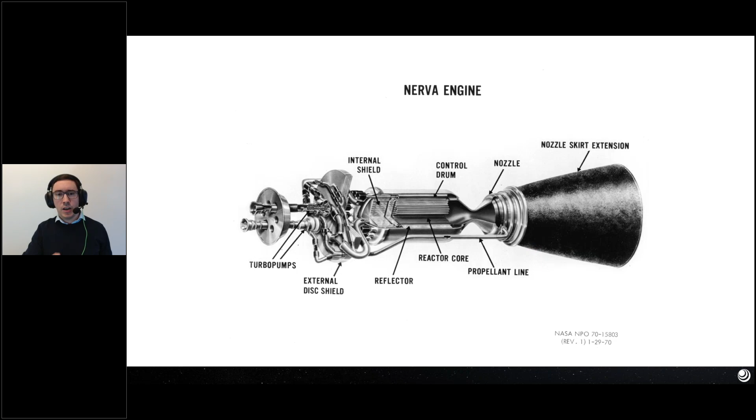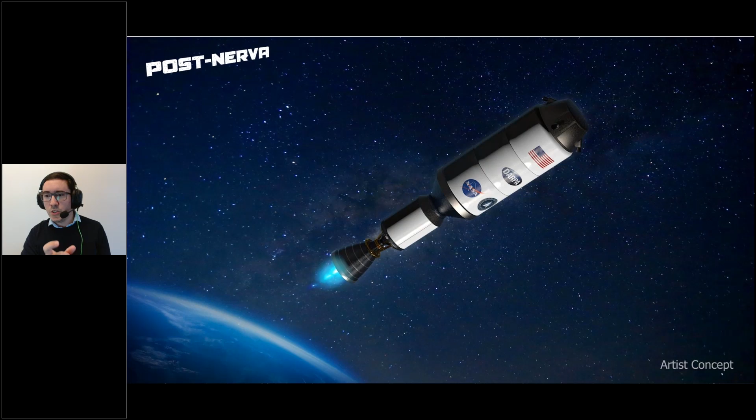Now, as I said, this is an old program from the 1960s and 1970s. And today, in the post-NERVA era, there is still research. In January 2023, NASA and the Defense Advanced Research Projects Agency announced that they would collaborate on the development of a nuclear thermal rocket engine that would be tested in space to develop nuclear propulsion capability for use in crewed NASA missions to Mars.

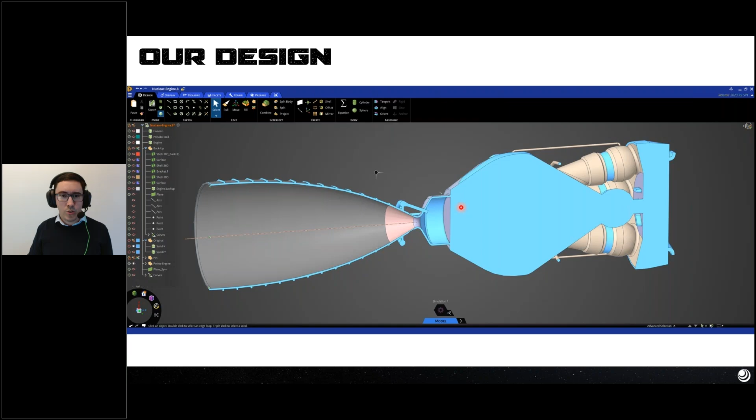Now, going into our design more in detail, we see the whole engine here that is attached to the Hermes spacecraft, and we are interested in the nozzle skirt extension in this area here. Here I could draw the geometry for easier understanding, and this is how we have tackled the model, and we have taken it into OptiSLang.

And particularly the problem, we have the skirt extension, then we have a load that is acting, connecting to this edge, and then we have a moment that is attached to the pin between the nozzle base and this column. And this is how the deflection for this column should be. So it is a mechanical problem application, and what we are trying to model here is a condition that exists during high accelerations for this spacecraft, particularly at the beginning when we move this mass in space. The way it behaves in this particular mode is depicted here in this animation.

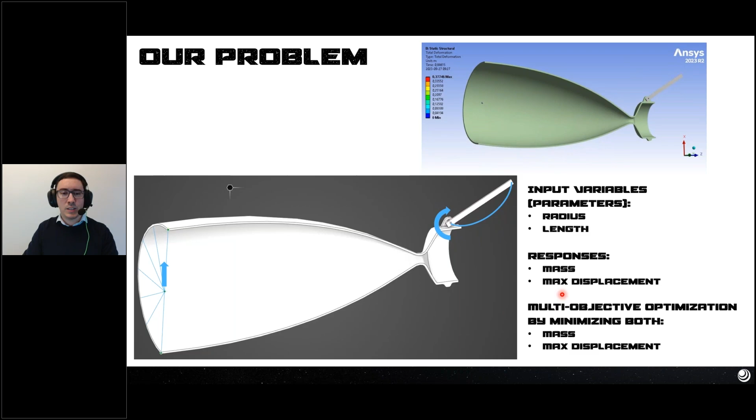We have two input variables or parameters, and those are the radius of this column and the length of it. And the responses that we are interested in are the mass of the column and the maximum displacement of it. And our objective in this project is to optimize two responses, namely the mass and the maximum displacement at the same time.

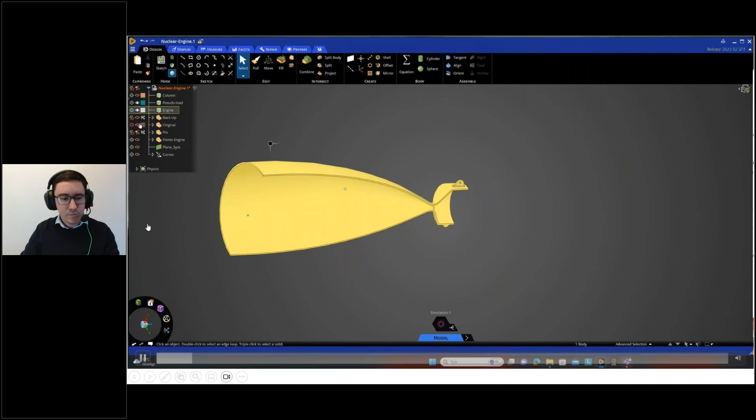Now I will go more deeply into the details on the Discovery side. And for that, I'm going to go through this video, trying to show what the tool looks like. So here on this panel, we can choose, for example, to visualize the components that we want to. We can change the color of them. We can then visualize them with different colors. We see here the full engine with all the different details and the colors.

Then at the top, we have different tabs where we can repair the geometry, we can remove areas of low quality, and then we have this simulation tab on top, and we have different options in there, and we have the possibility to move this project into a traditional tool like Mechanical or Fluent or Workbench. And here we see the materials. This material set is coming from Granta. We have more than 4,000 different materials, and we are on the model mode.

We can go into the explore mode, and then we can run the results. We see in the panel the different boundary conditions for this mechanical problem. We see gravity, for instance. We see the supports, the kinematic boundary conditions, dynamic boundary conditions, the loads. And we can define all these inside this tool. Then we have here at the top the fidelity area, and that is an important one, right? It's about the accuracy of the model. We can set up the fidelity approach.

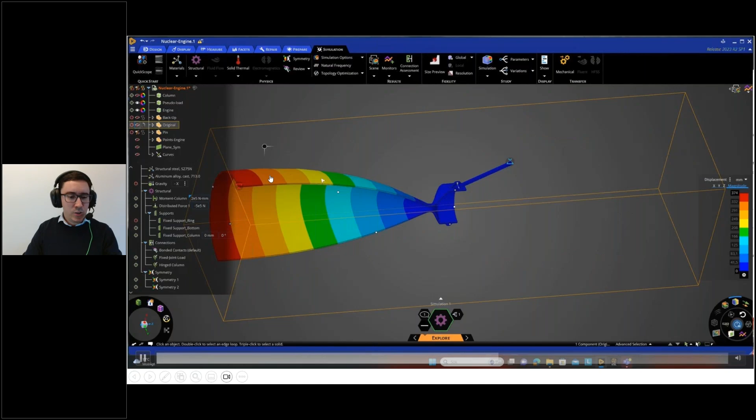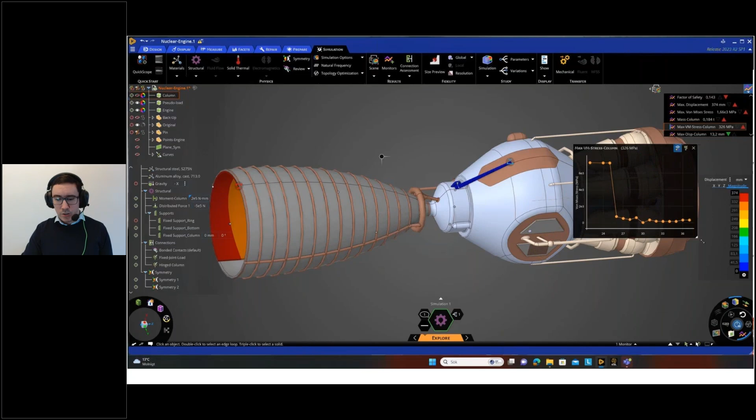We change here the mesh size for this tool, and then we can decide how accurate we want it to be. This is a tool that is using your GPU to solve it and to give results really fast. I click here to solve this model, and then it's already giving you some results. Okay, it's doing some iterations, and meanwhile you can select which part you want to see. You also select which parts or components you want to include in the simulation. Different options in there, visualization stages. I can pause the simulation, and we can also monitor different variables or results or plots and different types of results. We see how these result variables are converging to the final value with different iterations.

We pause the simulation again, and then we can see here a parameter manager, and here we can see what the values are for those parameters. And this is an important part because, as I showed before, this is the stepping stone of our next tool, that is OptiSLang. We need a parameterized model.

Then at the end, we can even move to the refine mode, where we can click again to run the simulation, and it's actually going to use the traditional solver. So in this case, it is going to run a mechanical simulation. It will create the same mesh as it would in Mechanical, and you will then be able to get that result without moving to that high fidelity tool.

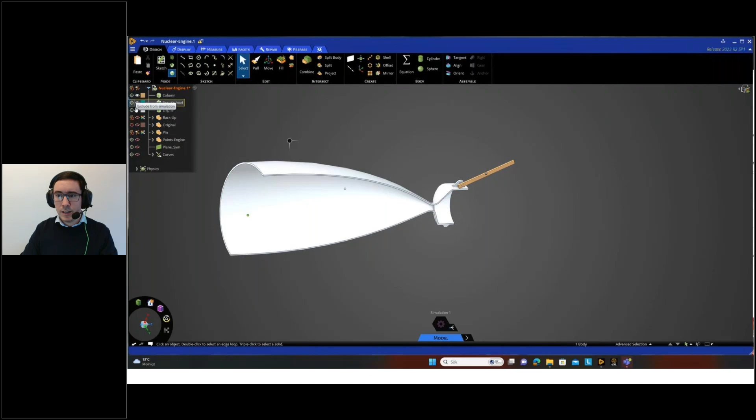So if we go to our next tool, that is OptiSLang. Well, first we use Discovery because we can achieve results very quickly, still in a low fidelity mode. And what we are going to do here is to connect that tool into OptiSLang. So I open the project, I can drag a wizard into it. Here I can drag that Discovery model to make the connection. We see here the parameters that we saw inside Discovery.

We select the responses that we want to use, also the input variables, and we can define here the range that we want to use for them. We can save those parameters in a file, and we can reload them. I can save this template for later on. And here, what I have created is the connection, right? I'm doing a check that everything is well connected.

And after that connection is done, I create a so-called sensitivity system, dragging that into our model. And here I can copy paste the same parameter set. In this step, if I let it go a little bit forward, I have selected the constraints before and the conditions, the responses in here. Then we continue.

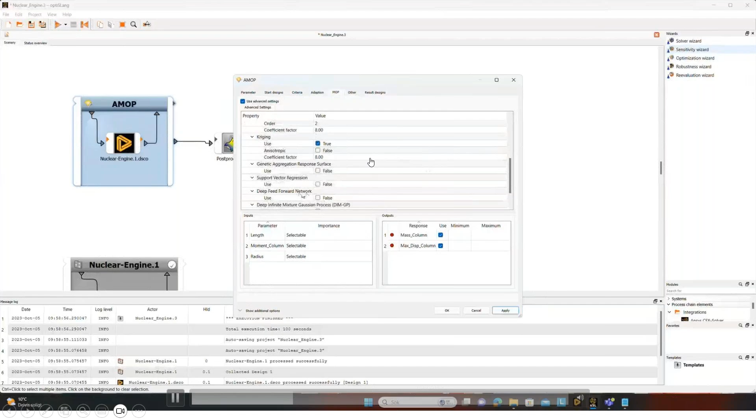We have here different algorithms for the sampling set, different steps. And then here, pay attention to this part. If you have a large amount of data, you can come to this window and this tab, and you can select to use a deep feed forward network algorithm that is integrated into this tool, again, when you have a large amount of data.

So we continue here after this setup, and I give some naming to it, and then when I click play, we'll see that OptiSLang is automatically running all those parameters and doing all those iterations, with many different variations done automatically, so you don't have to decide which points to select. And this is the part that takes most of the time, for the very localized small pool of data that is going to represent your particular problem.

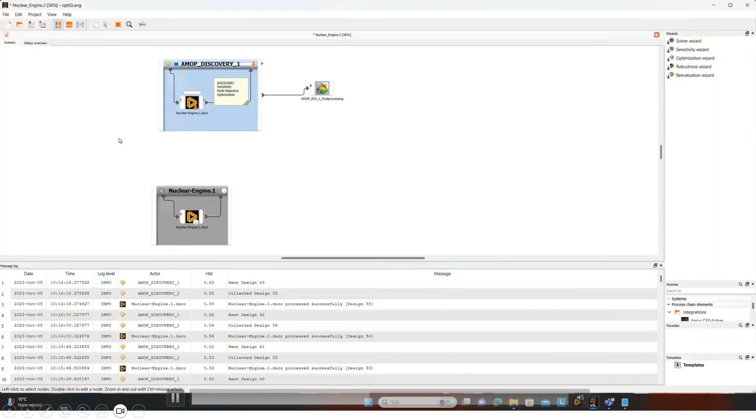And we can monitor the progress as it runs, what's happening with each design. I go a bit faster, and we see the progress, how it is going on, okay? It is running, we monitor, and then we get some results. For this particular case, we run around 100 design points in about 30 minutes.

This tool has a post-processing module, and we see here the response. We see all the data that was generated in the space we have selected, for the ranges we have chosen to explore. And we see the response surface coming from the model trained on this data. And we can visualize which parameter is more important than which. For instance, this is the radius, and we see interaction effects between them.

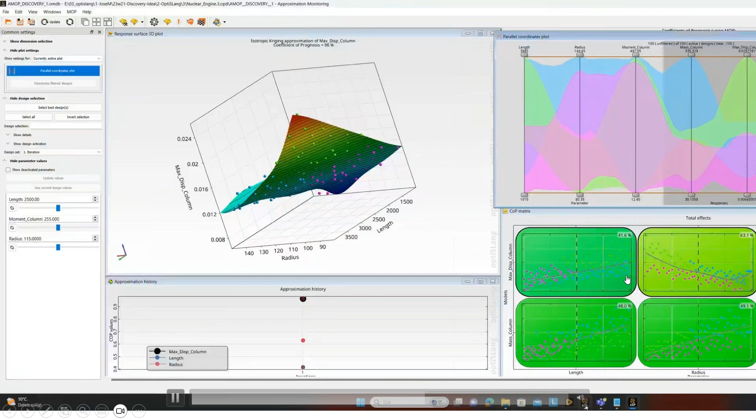We can use different tools for post-processing this data. For example, in this case I have used a cluster analysis to find trends through colors. And we see that those cluster colors are transferred to all the windows in this post-processing tool. And then coming back to the model, we go into the second sector, that is optimizing on top of the sensitivity analysis.

We do that through the wizard. So all these workflows that we are creating here are done automatically by OptiSLang. So we can say that this is a low code, or in this case, no code machine learning tool. We copy paste the same parameters from before, we keep the same responses. And I want to go back a bit. This part is important because, again, the responses, and then the next window.

Here we decide which model we want to use: our real project, or the MOP model, that is to say the trained model based on the data sets we have used for training. We have different options, and the software will recommend the algorithm that is better suited for this purpose, for optimization. So we can define with how many designs we want to validate, since we're using the trained model.

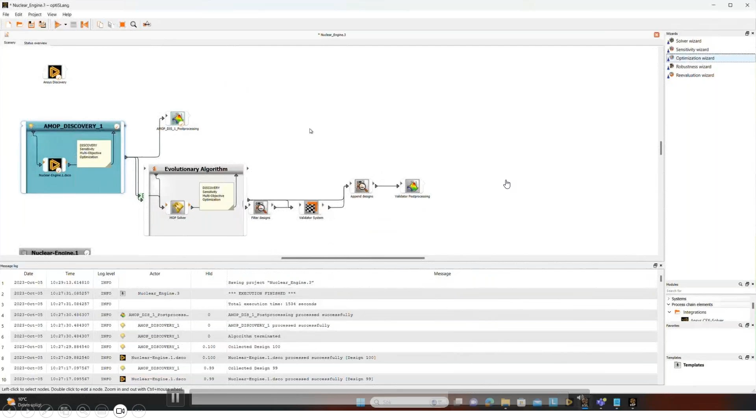The workflow is, again, automatically created by OptiSLang. This tool offers a lot of flexibility, meaning that you can tweak these workflows if you want to add extra steps or connect different tools, for instance, Excel or MATLAB. We continue forward. And after the naming, I can start the optimization journey. Now you see in real time how fast it is when we select the MOP as the base for the optimization task.

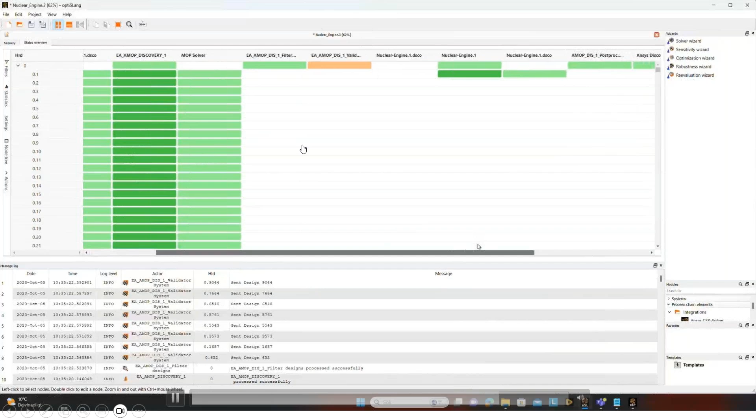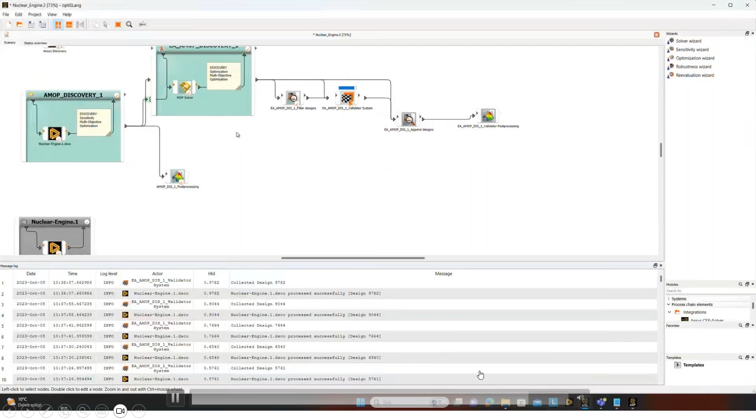So it has run already 10,000 points on the optimization part using the model that has been trained on the data set we created before. Again, we can see the progress for all the systems inside the scenery. And I go a bit back. Then it goes into the next stage in this workflow, the validation of those designs. For that, it takes the same discovery model we created before and does the validation stage. So we see that it is amazingly fast.

Then it gives us, in this post-processing window for optimization, the so-called Pareto plot. We have the two functions we want to optimize: the mass of the column and the maximum displacement. So we don't actually get one single point, but in reality a front with different options.

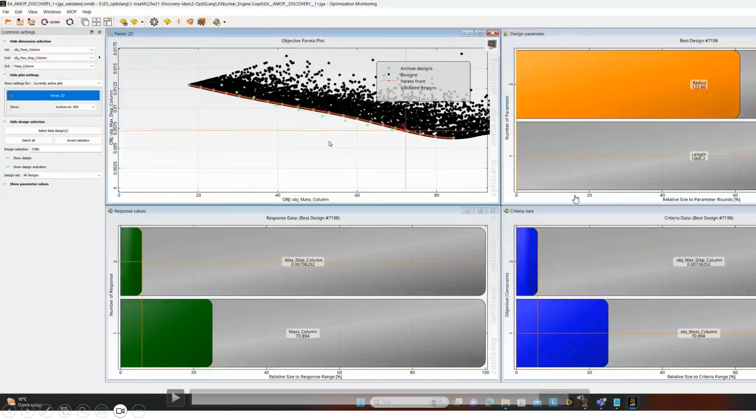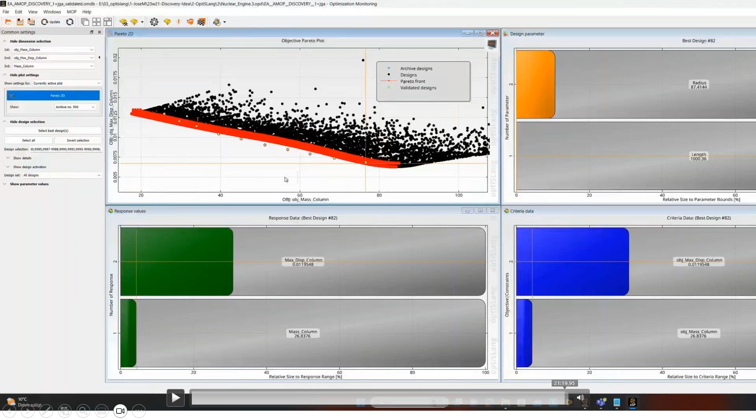And the reason is that these two functions are in conflict with each other, meaning that minimizing one will maximize the other one. So we need to find a trade-off. Again, more into the post-processing, we have different options to visualize what the values are for the different parameters and responses. And if we have constraints, we will see them here. I select different points and I can play a bit with the optimization. So that is about OptiSLang, okay?

Now, going more into comparisons. So the best design from Discovery is the combination of these two input parameters. And by the way, the moment that was applied to the column doesn't influence the results significantly, and OptiSLang has taken it away. So again, going to the Discovery results, we get this mass and we get this max displacement. So 41 kilograms, and then reading exactly the same results from the high fidelity tool Workbench, we get 44 kilograms in mass, and it is around a 7% difference. And if we compare then the displacement, we have a 13% difference.

So yes, there is still a difference on the values themselves, and that's still the state of the art for our so-called low fidelity tool. Now, the trend that we see in the market, and the vision that Ansys has, is that this gap is closing as time passes by. I'm not an expert on the Fluent side, but what I know is that on the fluid side, the difference is getting even shorter than this.

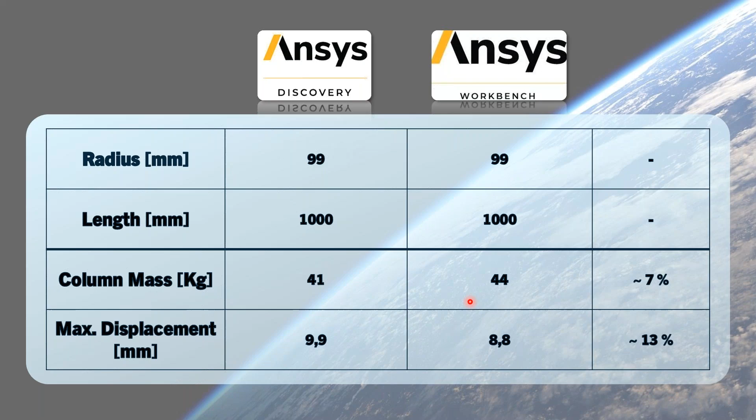So now let's go into a wrap up for this session. So we propose a new process with the whole idea, because we want to reduce time to market to deliver products faster and further. So we first use the Discovery software to model. Then we parameterize that model. Then we move that model into the OptiSLang platform.

Then we create the data. Then we apply a machine learning model for training on that data. And then we optimize on top of the trained models. And then finally, and pay attention to this part, we can use the high fidelity tool as an appraisal control. So we do a high fidelity switch just as an appraisal control at the end of this workflow.

Now, what is the main reflection then about this project? Well, ta-da! It is possible to find an optimum with low fidelity data.